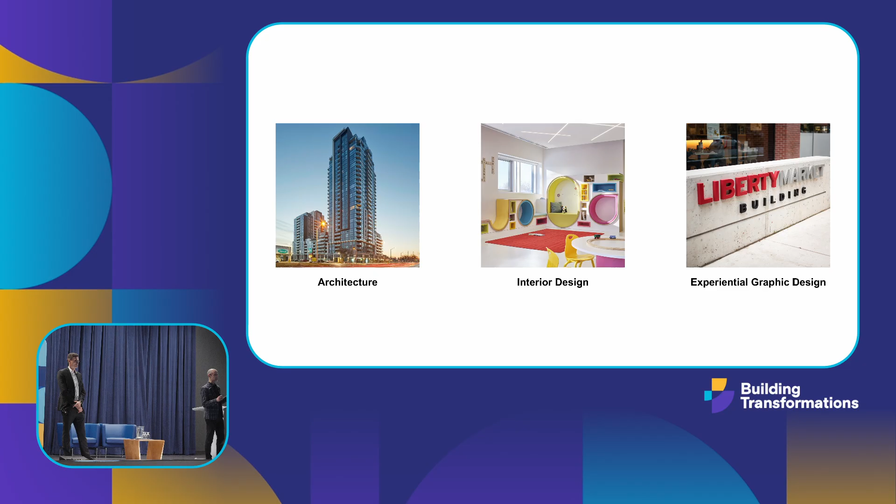So part of our work is learning, and we're a learning organization infused with technology. We want to constantly better ourselves as we're going through everything that we're trying to achieve. The work we do, we work through three main services: architecture, interior design, and experiential graphic design. And we take those services and we scatter them across these various sectors. So we can do any one or more of our services within any one or many of these sectors. And they're all just fun projects to be a part of. So that's us, Turner Fleischer.

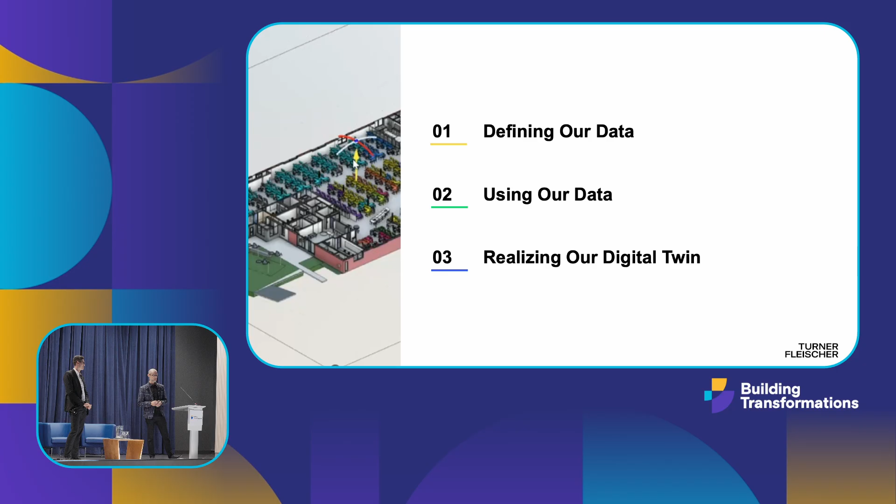What we're going to focus on today is our pathway towards digital twin that started with the definition of our information and how we structured our information, how we end up using our information, our data, and then realizing that into a digital twin. Thank you, Brent. So we're going to start with defining our data.

So we had to ask ourselves, what data are we even pulling? What data do we have available? And in a studio, it can be really overwhelming, the amount of different data sources that you have, right? Because data is just information. And you hear this talk, organize your data so you can leverage AI. So that is really the first step, and it was the first step for us on our data journey. And so we focused on a few data sources.

We have our SQL database. If you don't know what that is, it is basically structured, relationship-driven data, usually in the format of tables. We have our ERP, which is Unanet in our case. That's storing a lot of the project financial data, the employee data. Of course, we have our BIM Revit files, which store all sorts of design data. Then we put those files in ACC. Now you've got even more data added through the collaborative platform.

M365, we store purchase orders on there. We have custom apps in-house. That has its own data. And of course, IoT sensors to assist in facility management, which really ties into what we do later with the digital twin.

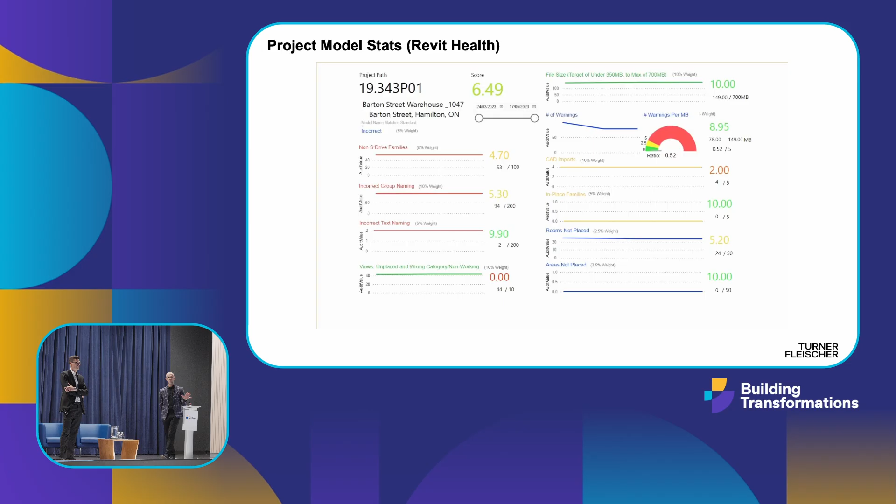So it's looking back, saying, hey, we made mistakes, let's do better next time. Artyom is spearheading the Guardian implementation, which is proactive, trying to prevent these errors from happening before they would ever reach a report like this.

And that's something that was chaos when I started. Everyone had a spreadsheet, and then it was, well, let's normalize the spreadsheet. And then we had a massive spreadsheet accessed by 50 people, and now it's all in an app, and it's just a beautiful world.

Right now, it tracks to the coming week, but then it's all being funneled into that target financial performance. So what are we budgeting versus what's my actual? The budgeted is forward looking, then that financial plan, Power BI gives me what did we actually do, and then I can compare plan to actual and see how good we were.

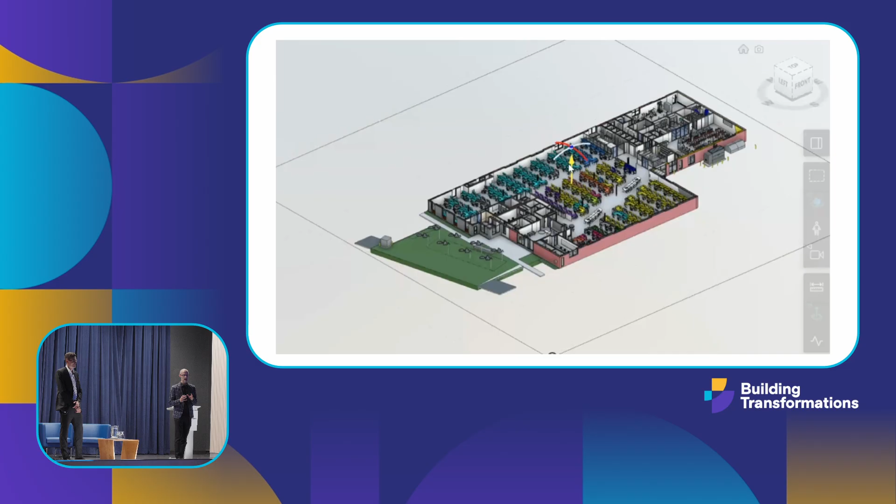We're developing a project. So this example here is our world. This is our studio. We were the client, we were the designer, and we were sort of the general contractor too, but we had a GC, but we were all over them. So this was our design, got into the model, and then we look at what we did with the digital twin. So we went through design, construct, and now are in operate, and we had to define what we want to do and why.

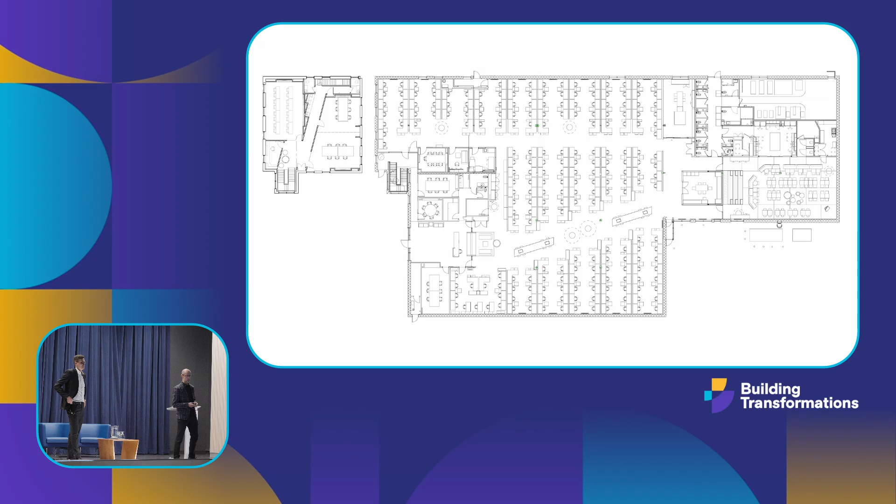So in our world with a digital practice department, one thing that's different aside from our software developers is our facility manager. When we were setting up our operational teams, we put FM inside DPD, digital practice, in order for us to leverage the technological side of running our studio. So as we bring up these assets here, the first thing I said to him was, what's something that irks you? We got back from the pandemic in 2021.

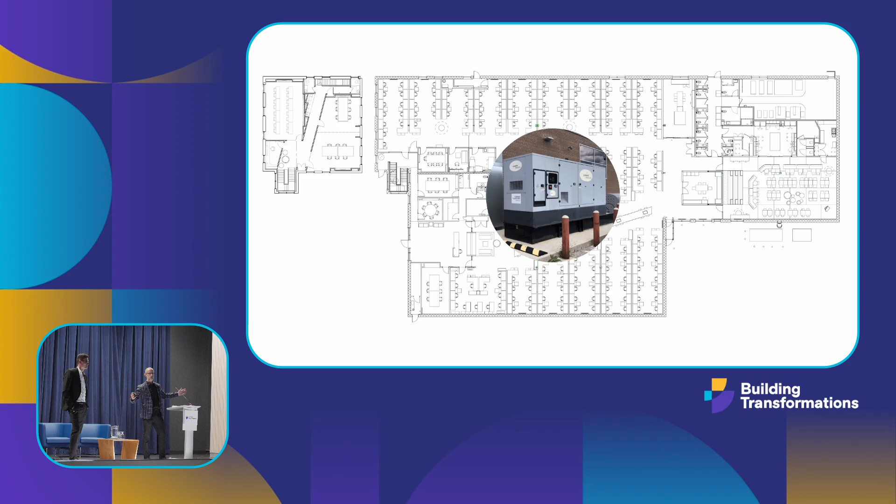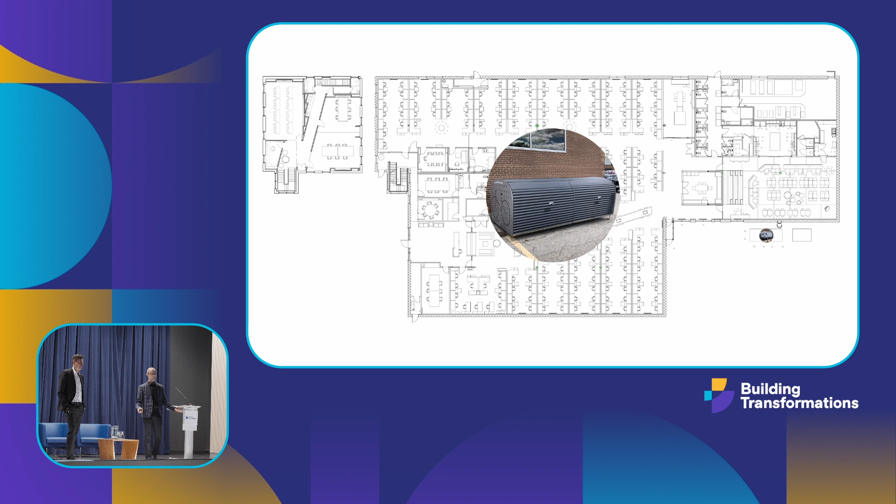The facility manager came in. I said, okay, so how are you managing our space? Let's look around our brand new renovated studio. And he said, the generator. I'm like, that's not even in the building, man, but it's out there. He said, the bike racks. I'm like, okay, another thing that's outside. So as we bring these up now, I asked him, okay, is there something that's inside? We have a green wall that needs a lot of asset management.

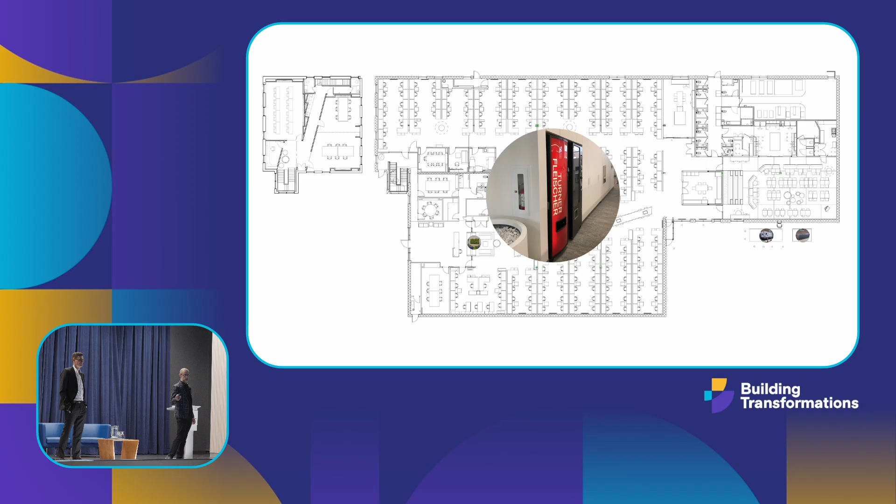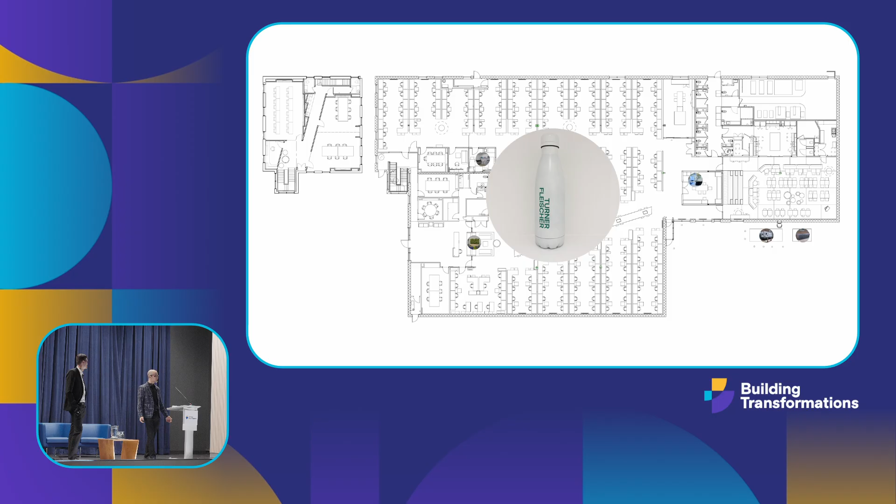So if we keep going through these, we have a vending machine that has to be managed, 3D printers, and our laser cutter in our model studio, actual printers that I want to turn into a coffee shop, we can get rid of them. We have swag. And I'm like, you're managing swag? I'm like, yep, swag, stationery. I said, that's not in the BIM, that's nowhere near the BIM.

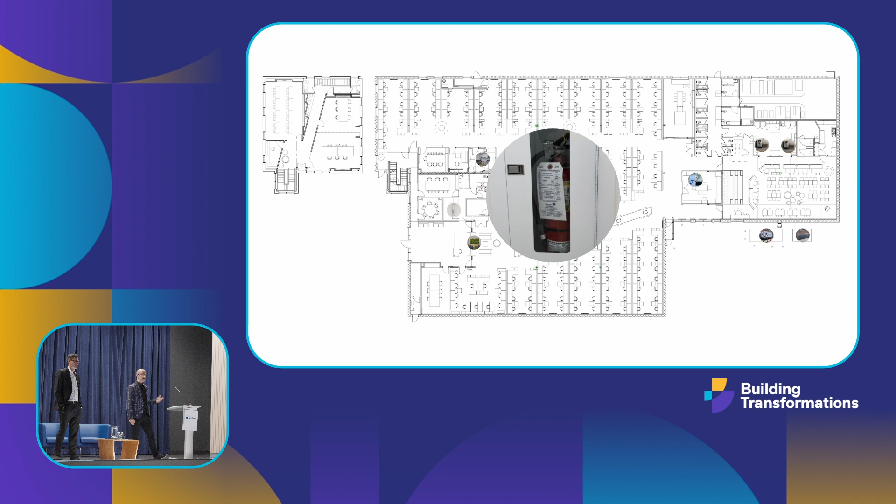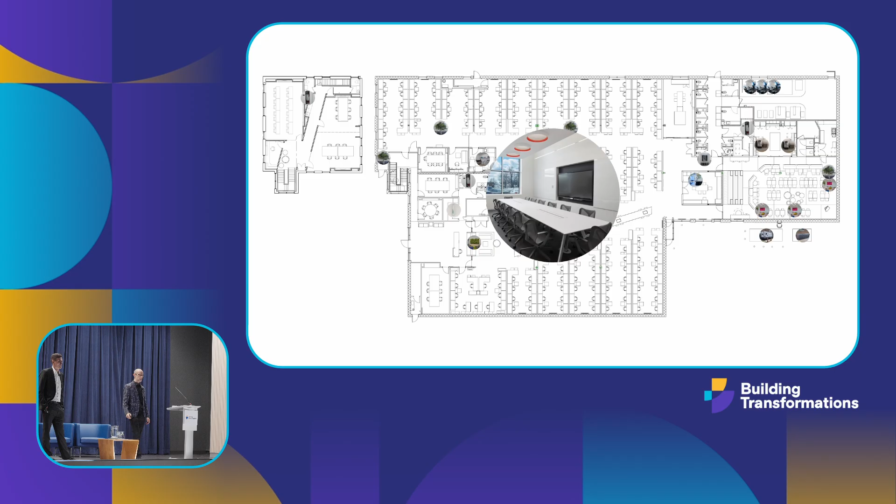My coffee machine, all of our coffee machines, when that goes down, we cry. Then safety, fire extinguishers. So you can see the things we're going through here. Gym equipment. We have a gym space and we have gym equipment. The big monitor on the wall, the water fill stations. And I kept saying to the FM manager, like, these aren't things we normally do. The living trees inside. Our smart boards that are all touchscreen, when those go down, it's like, hey, Brent, CTO, fix it. I'm not a repairer, I don't know.

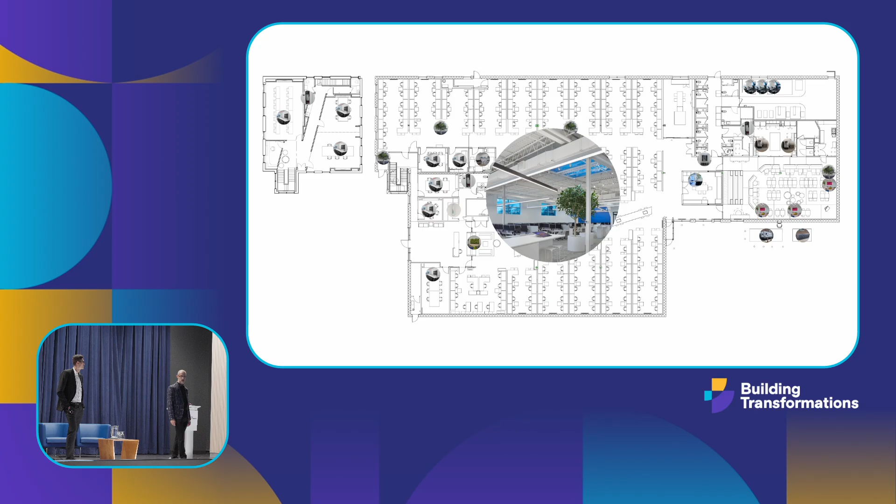We have operable windows that tint when the sun shines on them. Well, guess what? Sometimes they don't tint. Guess who yells and gets yelled at? We have our IoT sensors that we've placed all across the studio. And then the last one is our sit-stand desks. So all of these assets, I said, okay, now I've got a mission and a purpose for a digital twin.

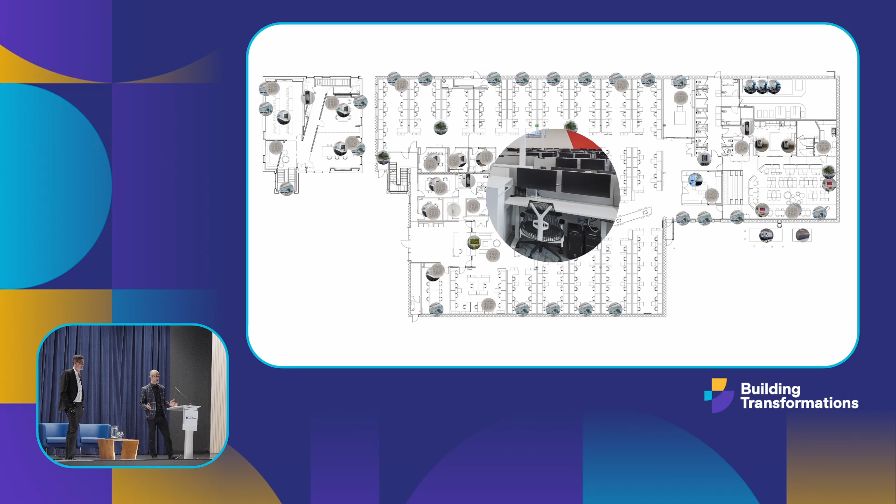And when you think of going through the BIM process, we're an architecture practice, interior designers, we designed, we constructed, now we've operated this, we've occupied our space, and all of these things are not the things I specified or made or took particular focus on as architect. Right? They're not floor finishes, et cetera. They're not life safety diagrams. It's specific things that our facility manager has to deal with.

And what are the issues? Things are broken, something needs repair, something's missing, something doesn't know where its location is, what parts to be replaced, what do we have in our inventory, something's dirty, it needs some cleaning, it's too cold, too dry, too hot, how does it work, and where are we seating? These are all the types of things that the facility manager has to interact with or respond to when dealing with all of those assets throughout the studio.

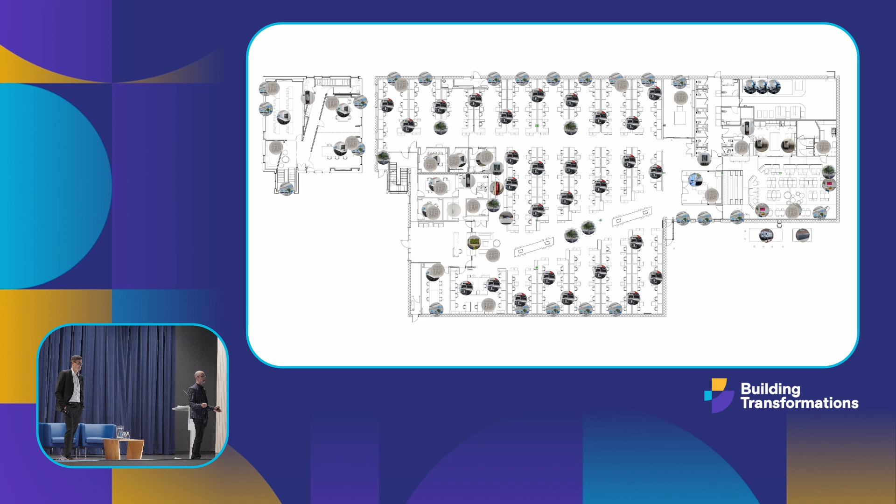And sitting with the facility manager as the owner-operator, we're able to then understand the routines around these and then say, okay, now what do we want to do in the world of digital twin? So in the world of digital twin, now we'll take all of these assets, pull them all together, and we said, now let's focus on 3 things. Because our CEO said to me, okay, Brent, nice CTO, slow down. There's so much we can do now in the world of digital twin. You can drink the Kool-Aid and go through so much. We said, let's focus on 3 things: spaces, wellness, and assets. And if we can do something with those, we'll have achieved our digital twin goal.

So next, it's how do we digital twin? Okay. We had to pick the right tool for the job, right? So there's a lot of market options, and we had to explore them all. There's cost to consider, there's ease of use, there's how it's going to connect with our existing systems, and ultimately we landed on Autodesk Tandem. We're in Revit, we're an architecture studio, that's not a surprise to anyone. It played really nicely with the existing BIM model that we had of our studio, since we were the designers, the owners. And when you're at a smaller scale, it's free to use, right? So you can't beat free.

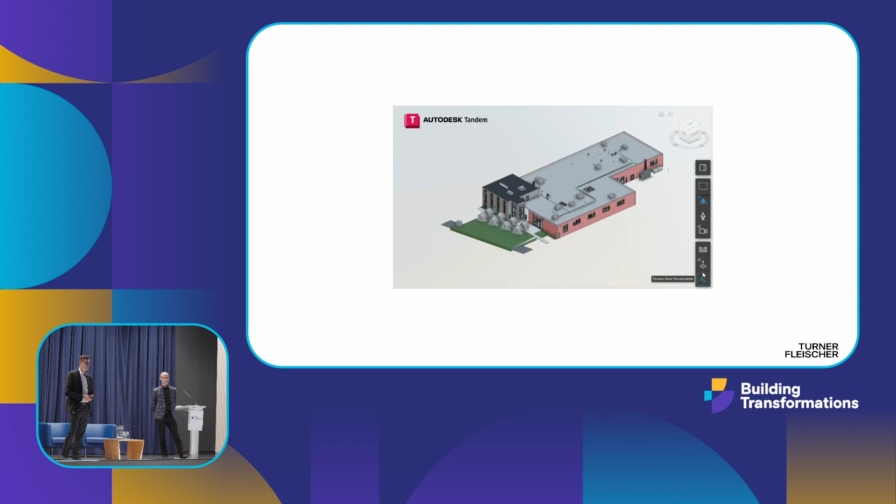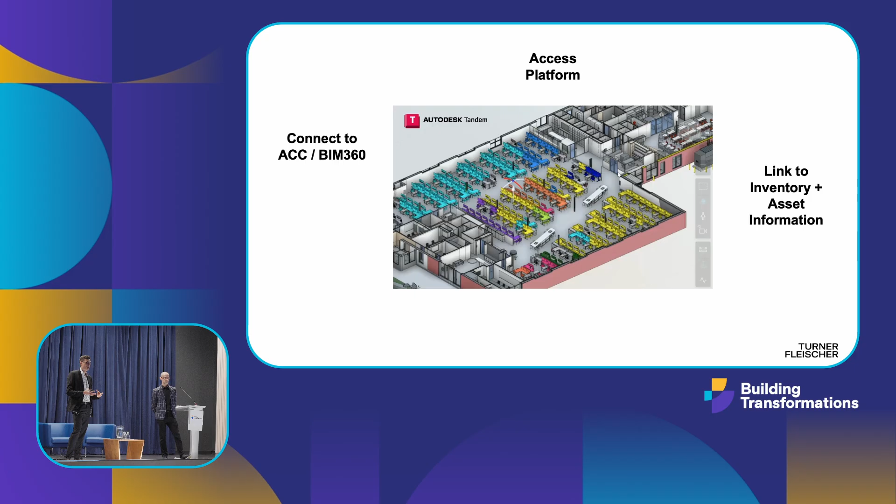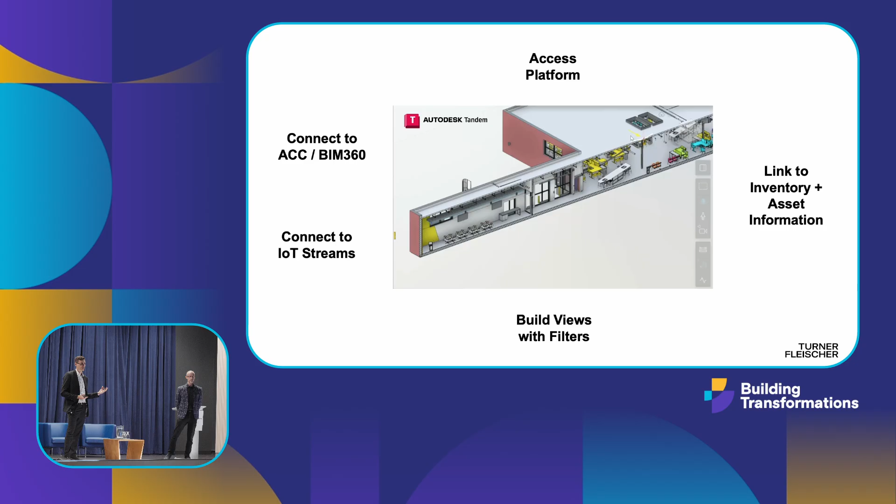And so there's a video running, showcasing our model in Tandem and clicking through some of the benefits of the platform. One of the things is, we talked about how you can't put absolutely everything in the BIM model. And so it links really nicely to inventory and asset information. It's already connecting to ACC/BIM 360/ I have to call it Forma now. And so it's got that cloud integration. It can connect to IoT, which we already had the IoT sensors. And then you can build views with filters.

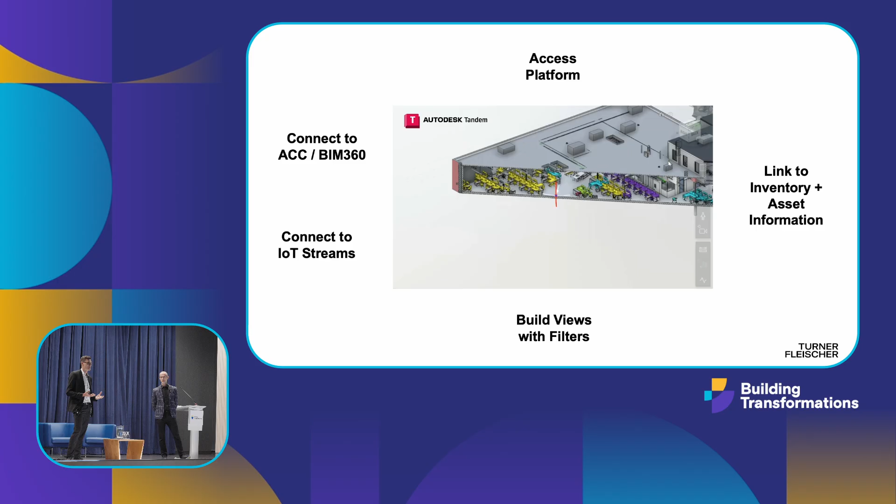So I remember one of the questions from the panels was, the client doesn't need all this data. Well, what you can do with these views is build a custom view of what your client actually needs to see in the digital twin. So looking at some of the spaces, just very practical, right? Desk management. We're in a hybrid studio, and we have to figure out who's desk sharing, who's hot desking, our teams sitting next to each other.

And then there's also IT considerations—network switches, data ports, filtering by managers, by occupants, all sorts of different ways to slice what really seems like simple data, just where do people sit? But ultimately, you need to know about that.

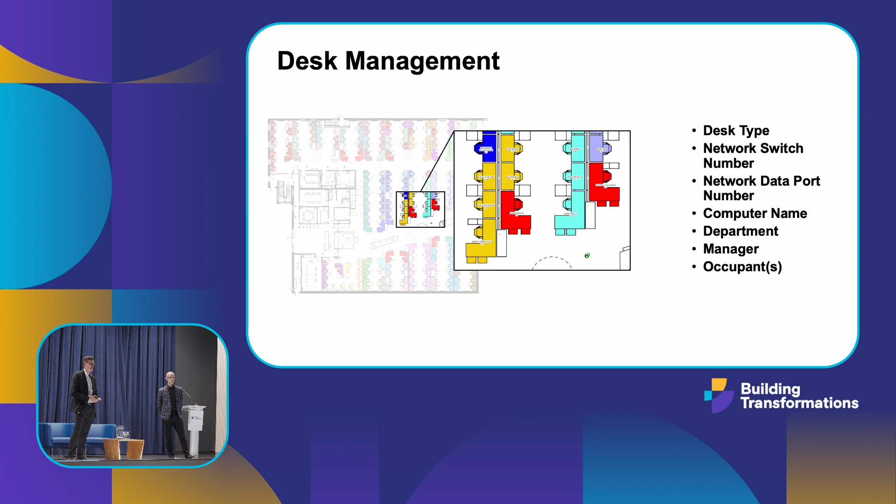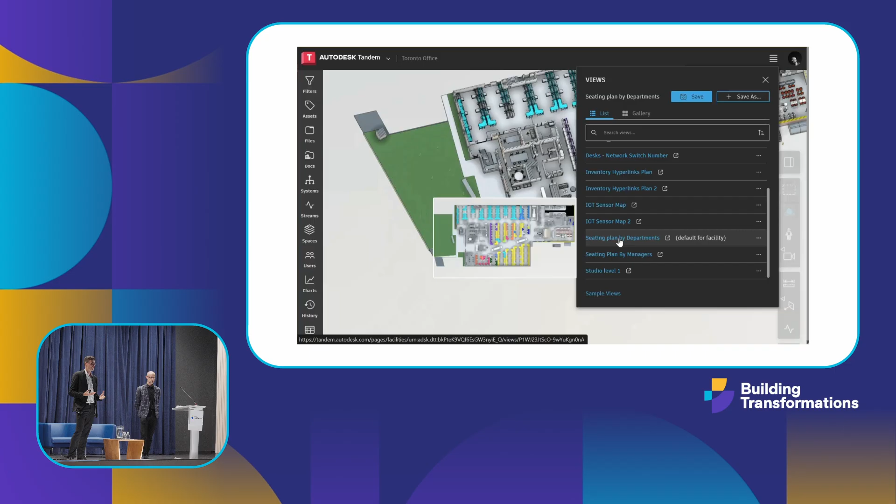So here we're going through the seating plan again by those different filters. We've saved some views where it's color coding different parameters. So this one is by department. You can see logically we tried to set up the studio in a way where departments are sitting in the same areas. And when you click on one of those assets, because it's connected to our Revit model, we have all these custom parameters.

So you can see all those parameters have a TF dash—that's for Turner Fleischer. We've added all of those parameters, and so we can get the manager of the person who's sitting there. We can get the station number, what computers are sitting at that desk.

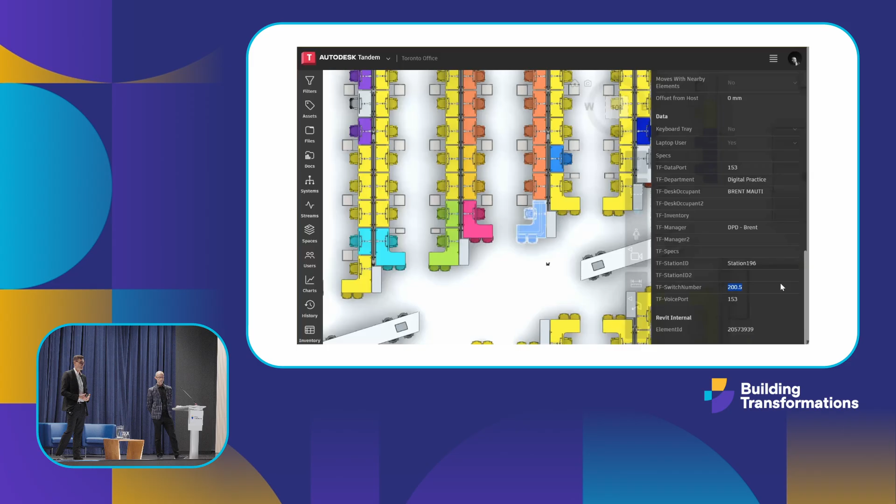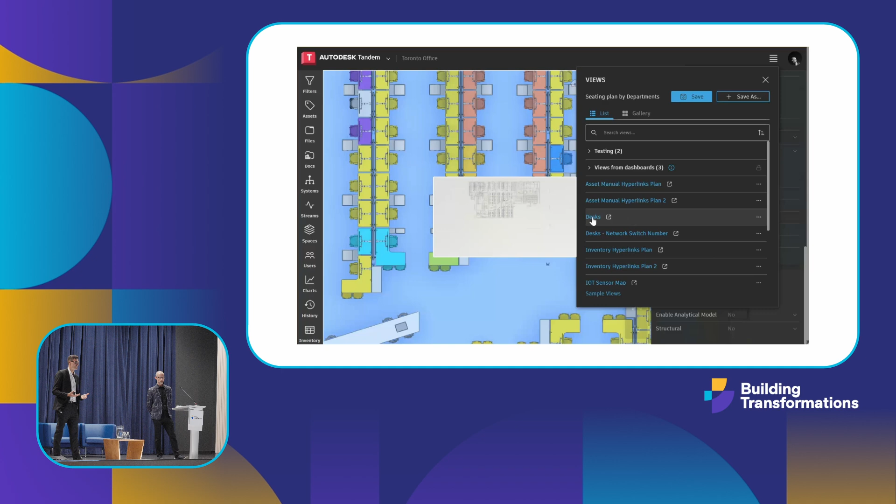And then another way of looking at it is going to be by the network switch number, which we're going to get to. This is something our IT department needs because we need to manage the loads of the network switches. And kind of a cool way of visualizing that is something called cluster view.

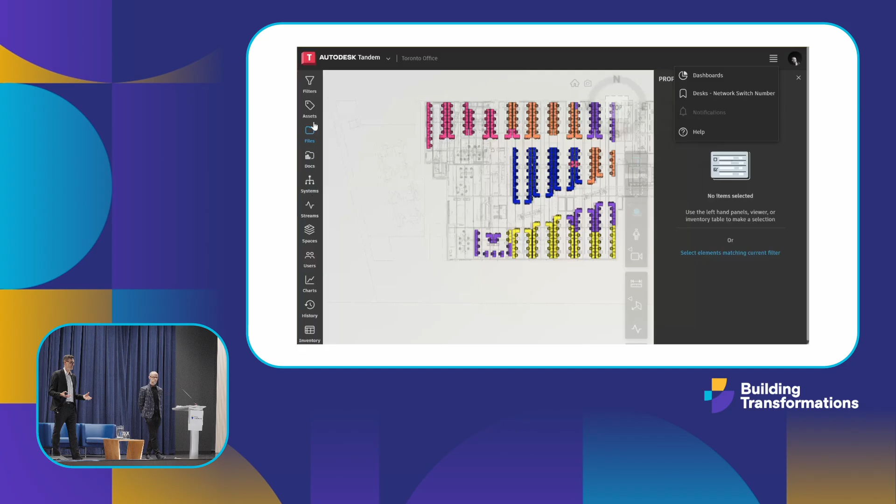So it's taking all of those assets and it's grouping them by a certain parameter. This is, again, a pretty straightforward application, but you can imagine this being used for any sort of parameter, and a different way of visualizing it, not just in the floor plan or the 3D model that we're used to.

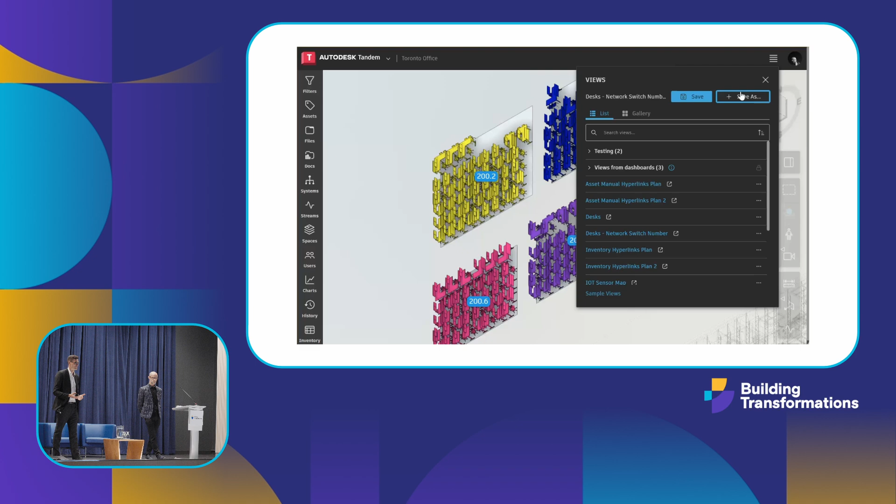And then going back to the overall desk view, you can see how easy it is to flip between these saved views. We can, again, click on any one of those and, again, drill down for those parameters.

So the next one is wellness. From a wellness perspective, we wanted to deal with indoor air quality because there's so much we can do with wellness, and we said, okay, let's look at these IoT sensors and figure out what can actually be done with them. So we set up an internal design competition.

We had about 6 teams saying this is how we want our sensors to be designed, and we went through this cycle, ended up with about 6 that were all pretty cool, so we kind of fused them all together, and we ended up with a solution, and we bought these sensors that can track all of these items.

So these sensors are Arduino sensors that we purchased for like $15, $20 off of Amazon. Each sensor sends a ping of information for all of those items every 5 minutes. We have an MQTT listener set up on a Linux server that hears all of the pings, rationalizes them, and feeds them to Microsoft SQL Server and timestamps it.

So now every 5 minutes we get a timestamping of our IoT sensor, which is awesome data that we can collect. If I said to you, now do something with it, you'd look at me and say, what do you want me to do with a SQL table that's full of whatever? And just as an FYI, the table is only about 1.5 MB, and we have data going back to 2021. So it's actually not huge data, which is cool.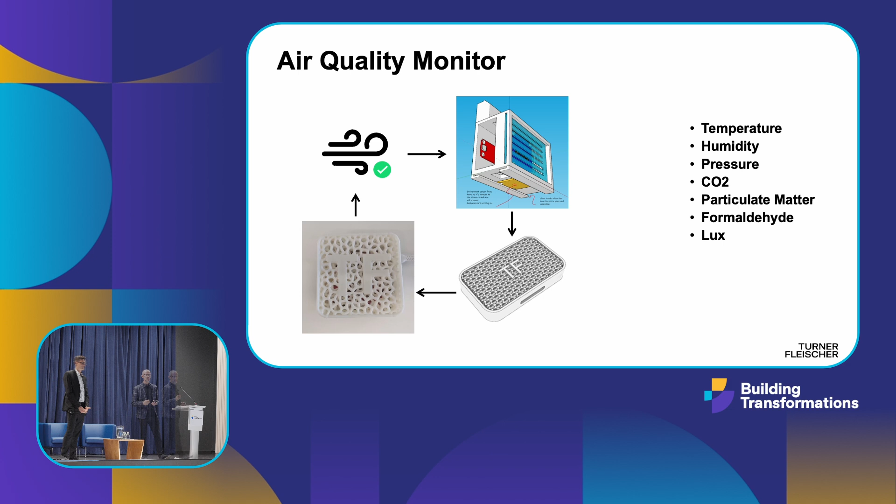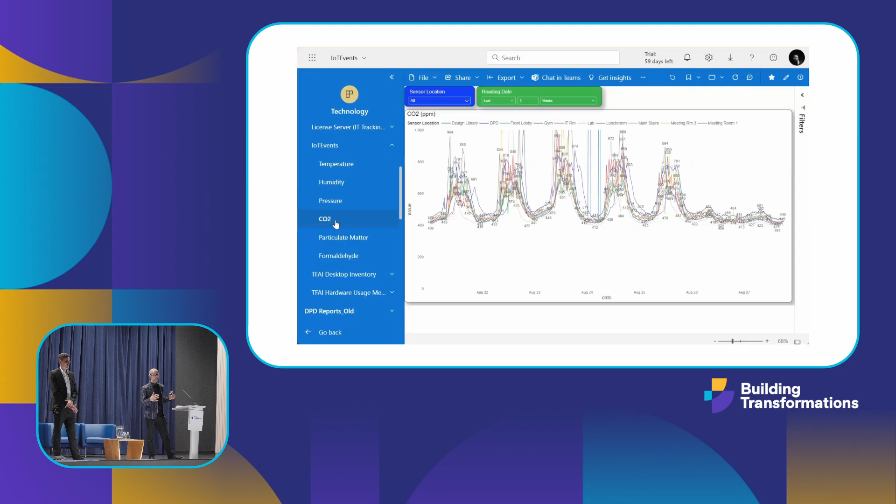So instead of looking at SQL, I've got Power BI. We're going to let this video go through. Everything comes into Power BI, and this is actually a simple Power BI. I pointed to SQL, grab that table, and I can now filter by the sensor type, and I can see a history going back as long as I want, because everything's captured in SQL.

I can focus in on a singular space. So if something was happening, my facility manager says, hey, what's the temperature in the front lobby? And look, it's a spike and then a drop. What's happening in the IT room? The IT room is like a little cubby hole that we have on the side, and they always say it's hot in there, and there's proof that, yeah, sometimes it is, right? So this data is all captured in the summer months.

As I'm filtering through, again, I land on a space and I can filter, and that's cool. So we're going to look at particulate matter for a moment. Some sensors have the particulate matter function, and you can see you got highs and lows.

But if I go back 3 or 4 months, I'm going to see a massive spike. That's around the July timeframe, forest fires in Canada, everything coming in from Western Canada, and you can smell the campfire. I thought our building was sealed pretty well, but our sensors were telling us, no, do something about it.

So what is an insight gained? We see that. Let's do some fixes. Is it weather stripping? Is it making sure the door closer closes? Because those automatic door closers, amazingly, don't always close the door. They need tweaking. So we discovered a lot of things and fixed them.

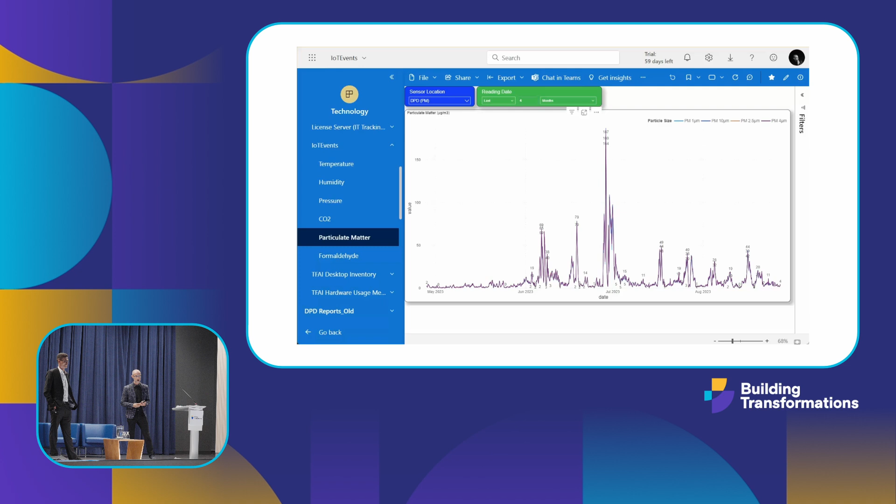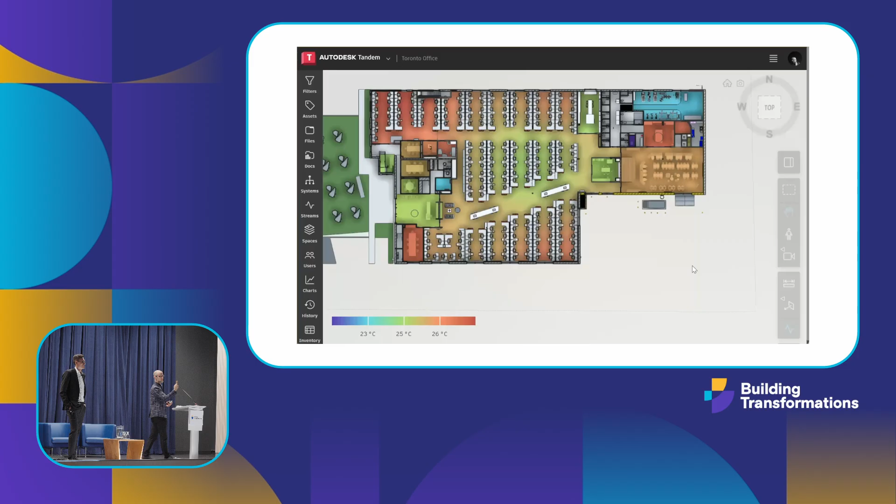But some people will say to me, this is way too complex. Enter my digital twin. Every IoT stream can now be plugged into the digital twin, bound by the space definitions that come from the Revit model through Tandem and exposed visually. The feed of the IoT is now bound by the space of Revit, and it's showing me hot spots of temperature, humidity, barometric pressure, CO2, etc.

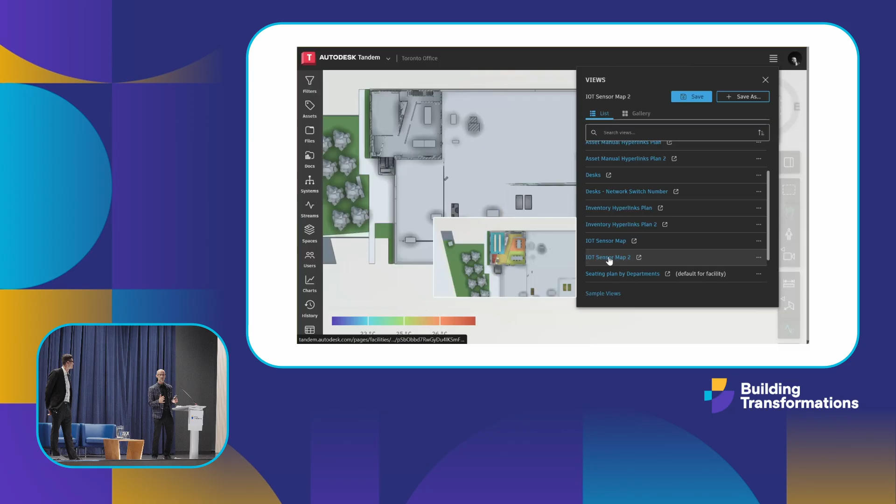I can set threshold ranges that tell me what's good and what's bad, because one challenge we found is, hey, we've got $15 sensors. The sensor says it's 26, but really it's 24. So the sensors aren't the most expensive. I don't really care what the temperature is. I care whether it's good or bad, and I want to see the trend of good or bad. So that's what we're tracking here.

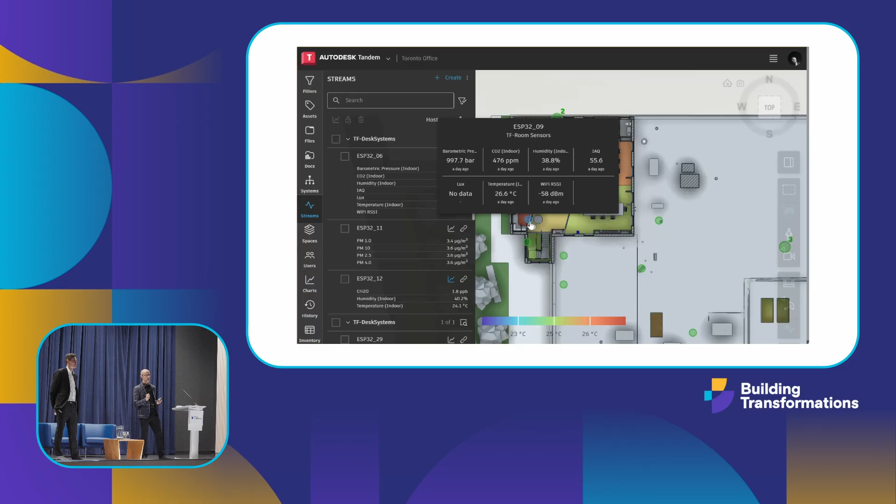We've since got a new stream of sensors from Kaiterra that are accurate to the degree, because we're looking to be WELL certified. Those aren't in my digital twin yet, but this has given me an idea.

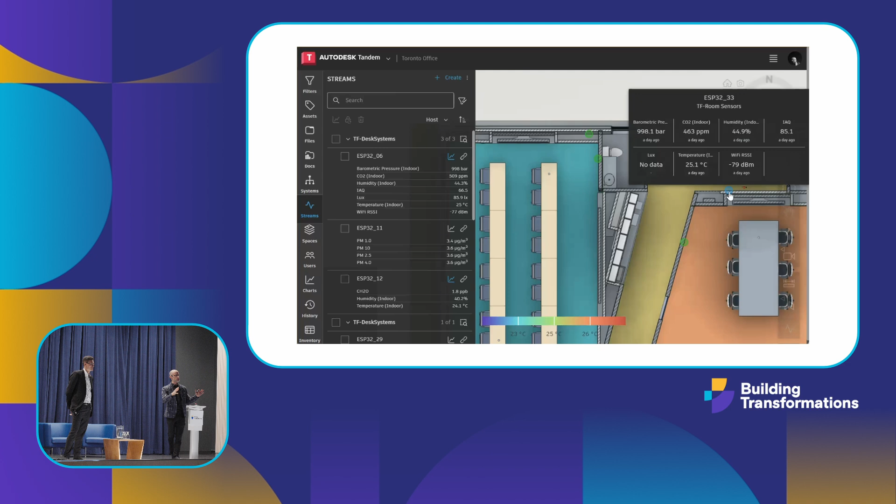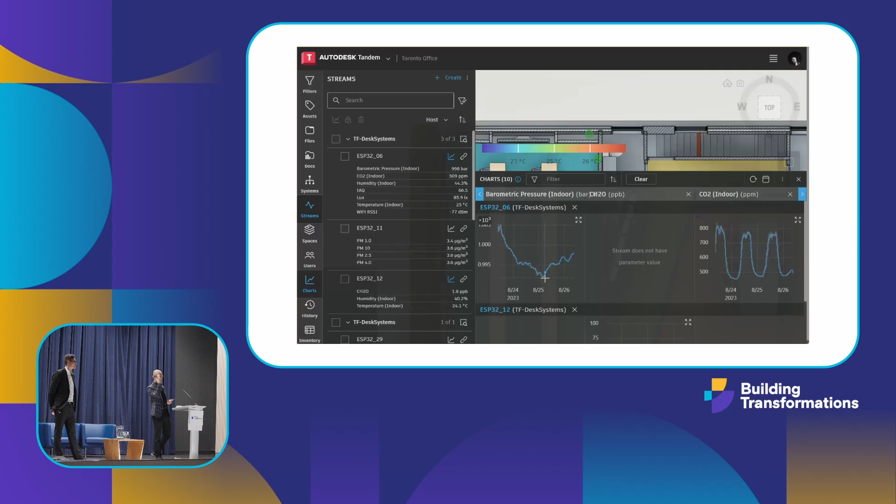And what did I learn from this? Just last August, I popped this thing open in the morning, and our main server room was bright red. At 6 a.m., I said, uh-oh. Opened the door, and it was hot, air conditioner failure, had to get it fixed, but instantly saw the problem because this thing showed me there was an issue. And boy, am I glad our servers didn't get fried, because that would have been a huge issue.

So how many people here have used Sortly? Anyone? Okay, man, then so cool. This will be new to some people, maybe exciting.

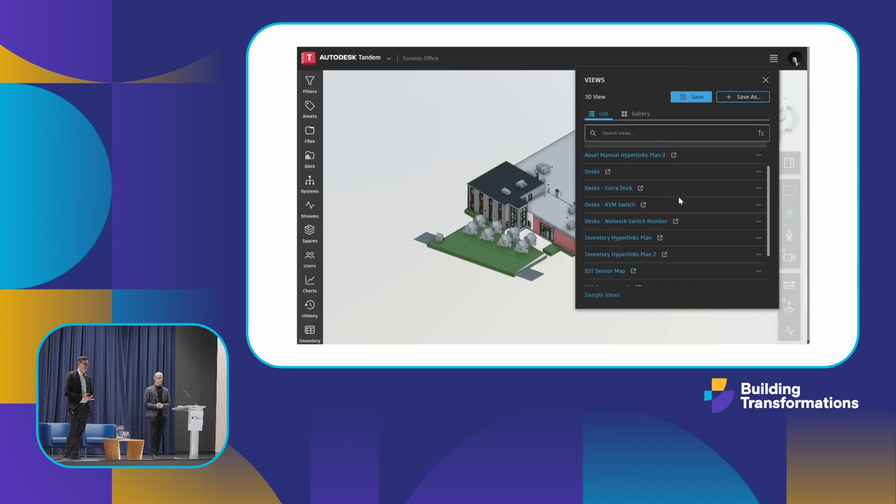But then documents, leverage the platforms that are best at dealing with that. So documents we keep in SharePoint. We can go to that exact same bike storage where on Sortly we're doing the fobs and put the how-to documents here, so you're getting all the relevant documentation on how to use that fob. This is again a different sort of saved view, highlighting in blue BIM assets that have connections to these third-party platforms like Sortly and SharePoint.

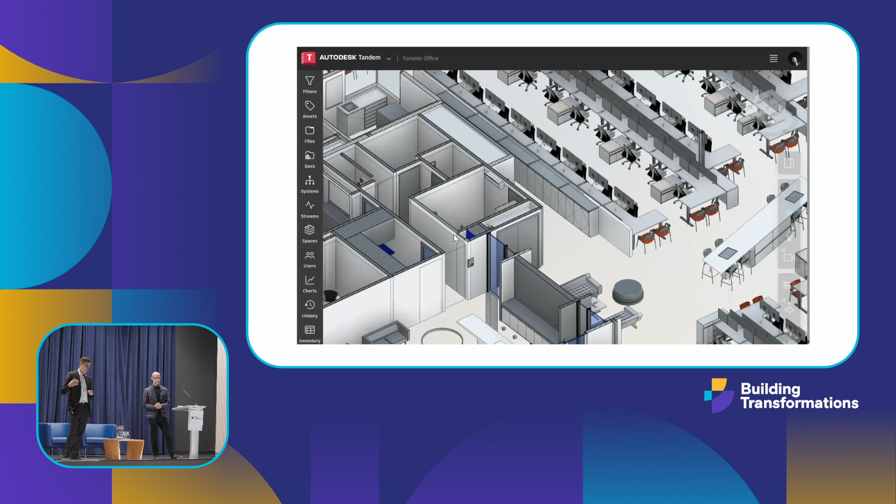So here you can access a hyperlink from that cabinet, showing what's being stored in it. It could be swag, it could be office supplies. Maybe we're running out of t-shirts and our facility manager needs to order some more.

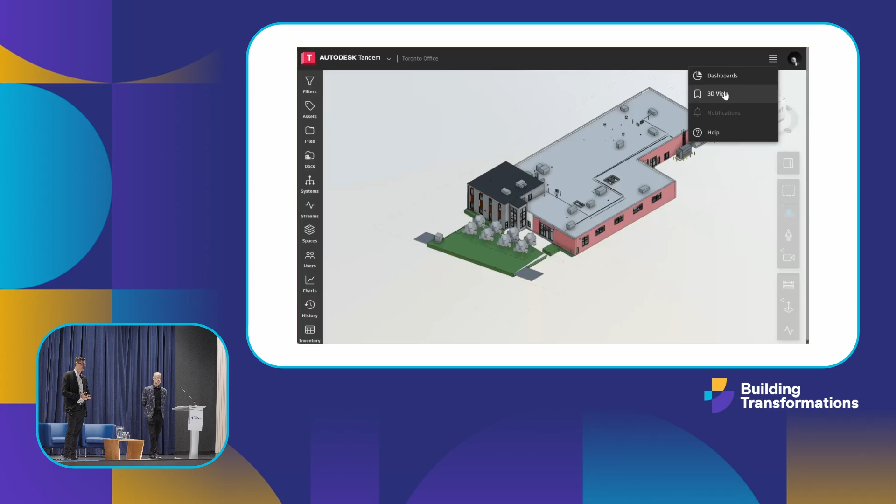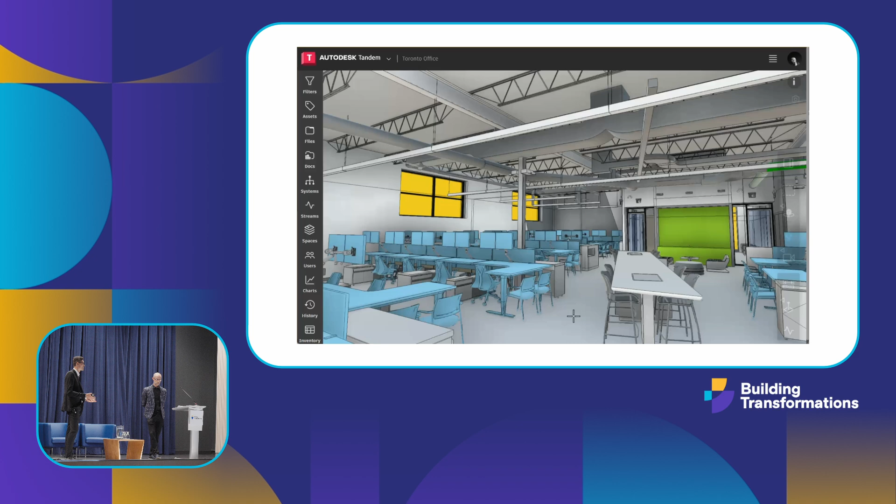This is another 3D view. Instead of going from that bird's eye view, you can also explore in the first person view of the same thing, navigating the studio. So our facility manager doesn't have to be there for us to understand how do we deal with the green wall if it goes down, right? Who do we call? Who's the contact for that?

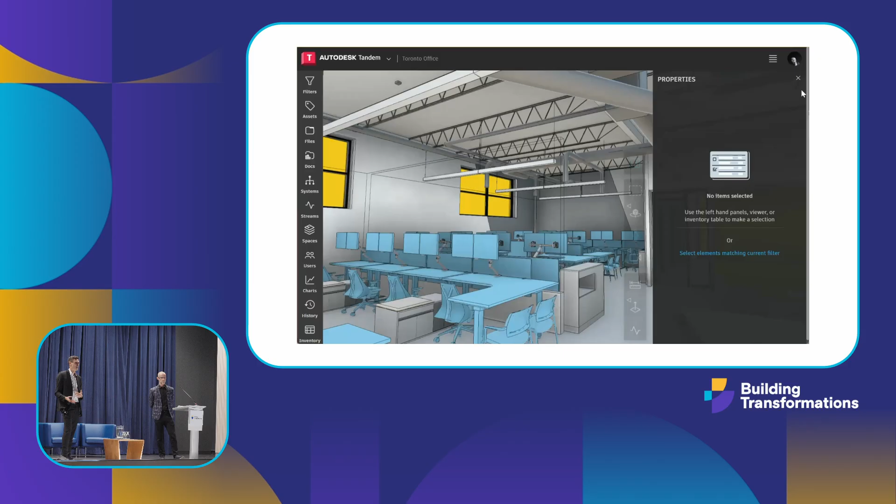So a lot of these have been really practical applications. And that's because we always asked our facility manager what would actually help your job. We're not doing cool BIM things just for the sake of it.

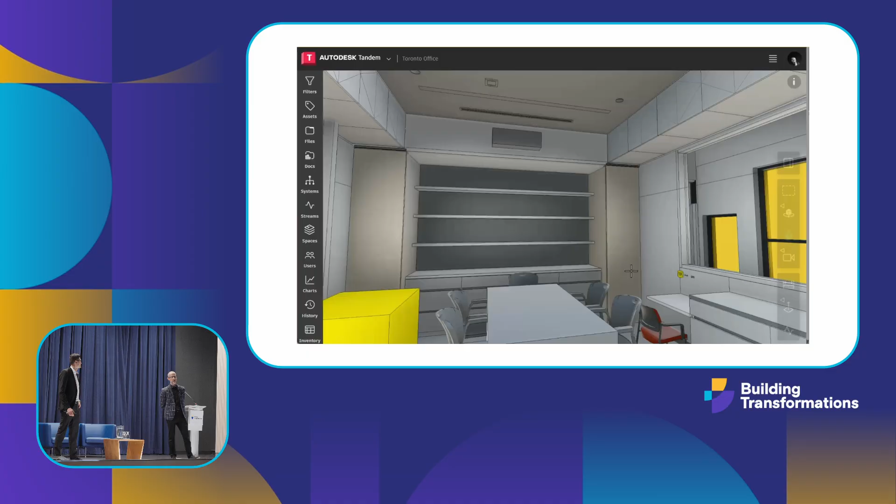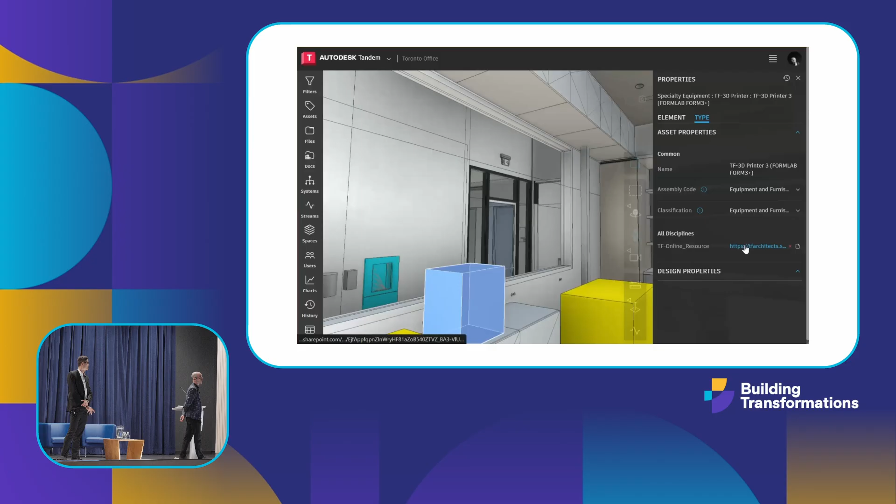This was all driven by his requests and things he actually uses day to day, because he's the one who has to update that inventory in Sortly and update those documents in SharePoint to get value out of them. As for the hyperlinks, once set, they never change. A strict folder structure in SharePoint ensures the GUID link is always the same. He manages the content within - the inventory in Sortly, the files in SharePoint. The links never change because they're GUID based, so you can rename a folder if needed, but we never change the folders, and therefore in Revit, going through the digital twin, that information never has to change.

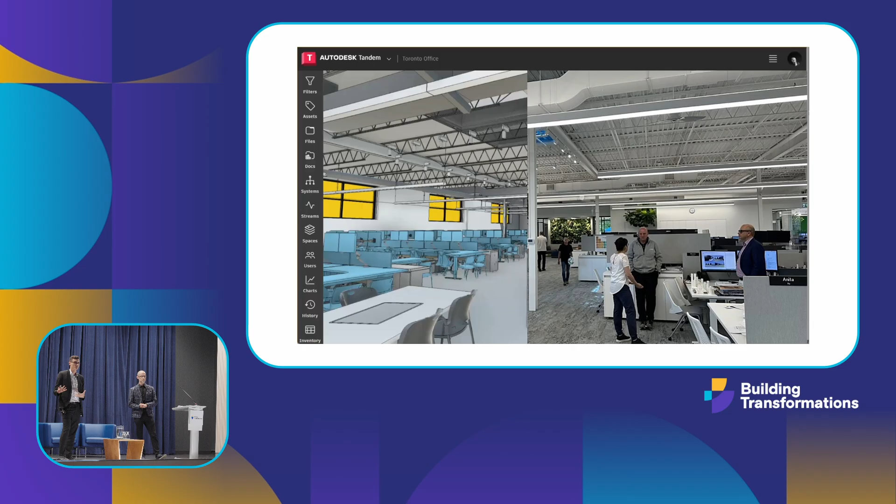Here you can see the digital twin overlaid with an actual photo of the studio, and our BIM modelers did a pretty good job. And that's what it's about, right? For us, a digital twin - if there's no physical, then it's not a digital twin. It's about that relation between the two, and about improving operational processes, being able to have IoT sensors for more proactive information.

So we're at the end now, just some closing slides here. So what have we used it for? The temperature balancing in the server room was a huge one, but I can look at the digital twin and understand where things are good and bad, what meeting rooms are hot or not. The coffee machine - one time it just wasn't spitting out the espresso I wanted and I couldn't figure out how to change the grind. Two clicks, found the manual.

Treadmill setting - hey Brent, the gym equipment's not working. Well, I'm a CTO in a design practice, I don't know how to manage gym equipment, but we're a couple clicks away from whatever you need to know about it. Connect your phone via Bluetooth to whatever machine we have there.

Seat assignment, as Artyom showed, so who's sitting where and why, and can we shift people around? Where's a flex desk? Can I take a project team from this location scattered and maybe put them somewhere for a month? And if we did that, what are the ramifications, etc. And then upcoming maintenance, I'll talk about that in a second.

So what's next? We're working with Autodesk on Tandem, and as they're advancing the platform, we're advancing with it. Tandem Connect lets us connect to other systems - we've got our lighting control, security cameras, etc. Tandem Connect will let us build binders to other data sources we may not have already connected to, or that might be legacy.

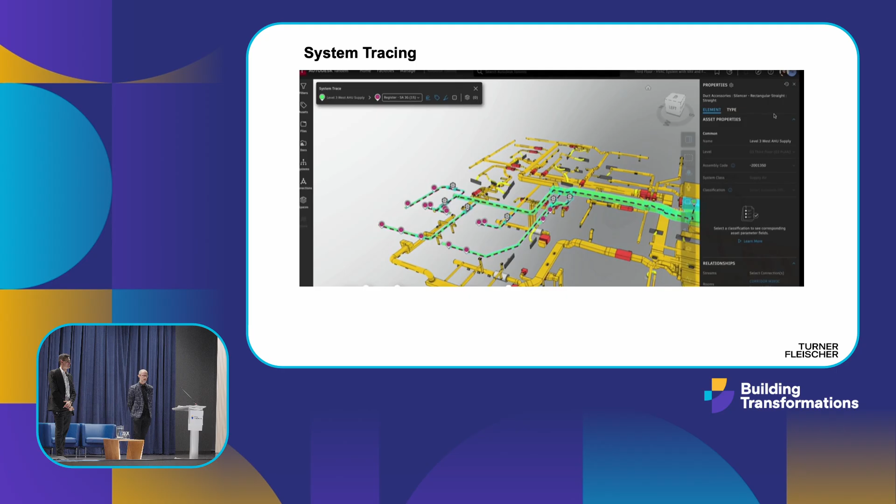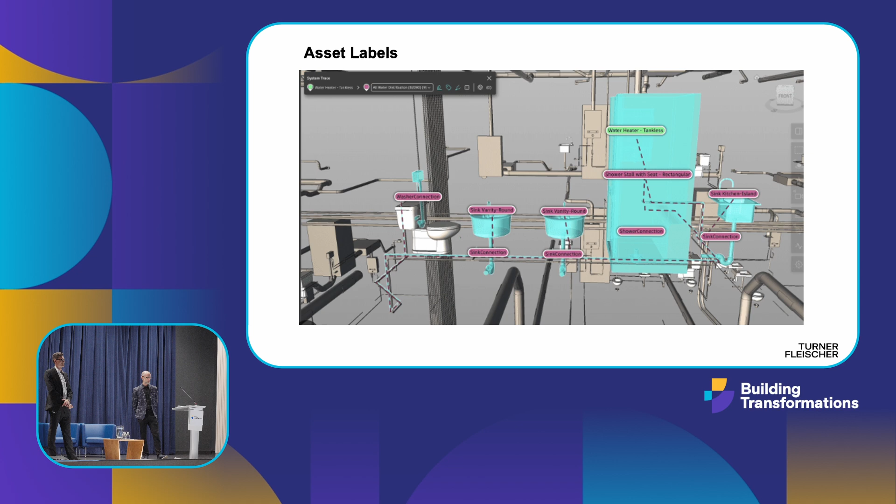We've got system tracing, so if I had a really good mechanical model, I can see how my mechanical and electrical is getting from point A to point B. That's something we haven't built yet for ours. Asset labeling is something that's now evolving - before it was just space labels, but now in my views we can include asset labels specifically.

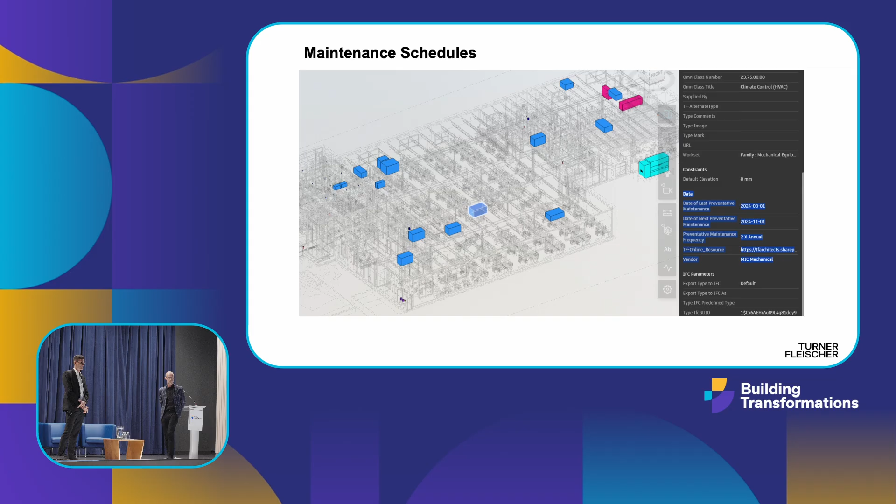Maintenance scheduling - we're leveraging the digital twin to say when something was maintained last and when its next maintenance is. I'm so excited that Tandem's about to release digital twin notifications, so when we're getting close to the date entered for the next one, I can have my facility manager and anybody else triggered saying maintenance is required shortly - is it ready or not? So that's cool. Rock on, IT team back there.